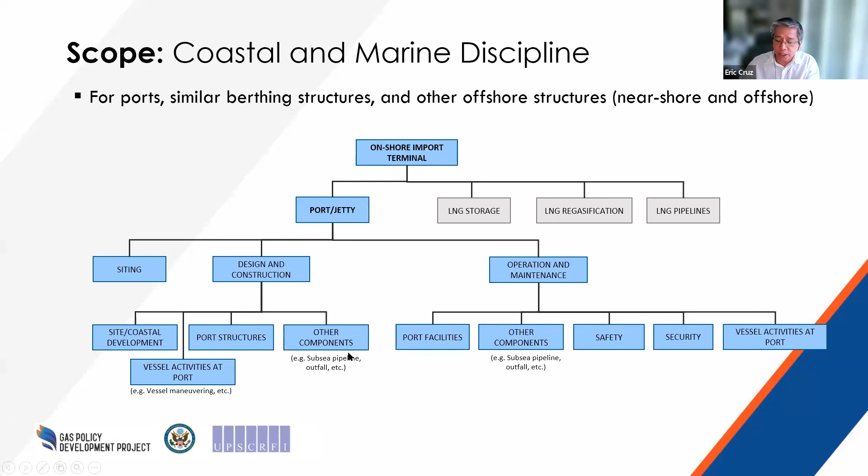This involves a different stage of the business permitting and other permitting activities. And in the design construction, we have site development, coastal development, the planning of the port structures, and other components like the fixed structures that are used in the activities for the handling of the cargo.

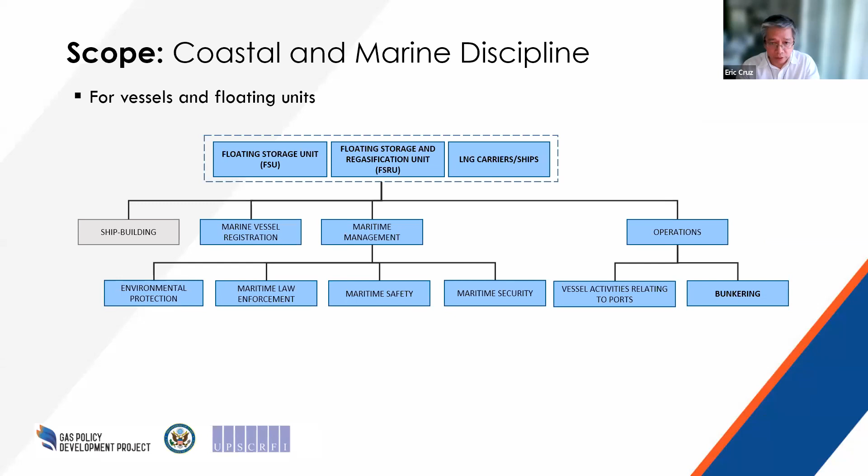For vessels and floating units, you have these different aspects that are under coastal and marine discipline. And I will focus on the coastal and port engineering aspects that are identified in this scope.

Tides are due to the planetary forces between the sun, the moon, and the earth. These forces are affected by the rotation of the earth about its own declined axis, and also by the distribution of the land masses on the surface of the earth. These are important forcing due to the environmental loads, because tides also become the takeoff levels of storm surges and other ocean hazards.

Winds exert shear stresses on the sea surface, and these stresses in turn affect the sea hydrodynamics that pertain to the water surface levels, the currents, and the waves. Also, winds become forcing functions to the drag and inertial forces that are exerted on docking facilities, as well as the moored ship.

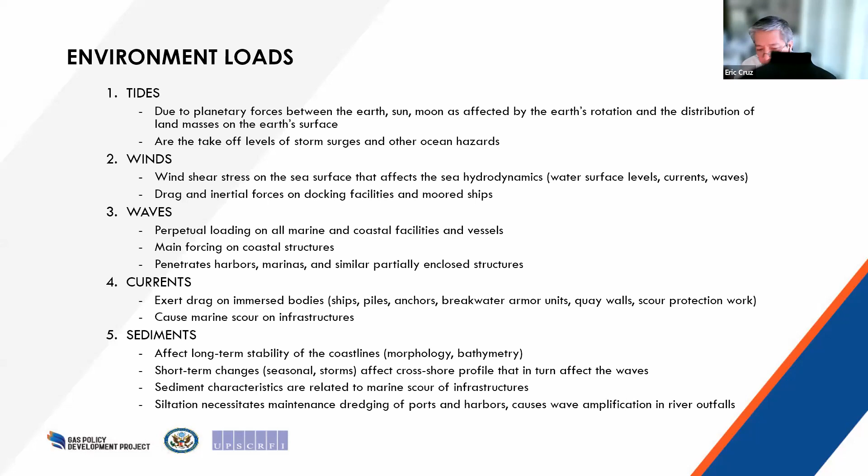Sediment characteristics are related to marine scour of infrastructure. So we need to know the size and the density of the sediments around our structures in order to estimate and calculate the marine scour generated by the action of currents and waves on these infrastructures. On the other hand, if you have siltation, this means there will be some decrease in the ambient depths of ports, and that means there will be a necessity of maintenance dredging of these ports and harbors. This siltation also causes amplification of the wave energy in river outfalls.

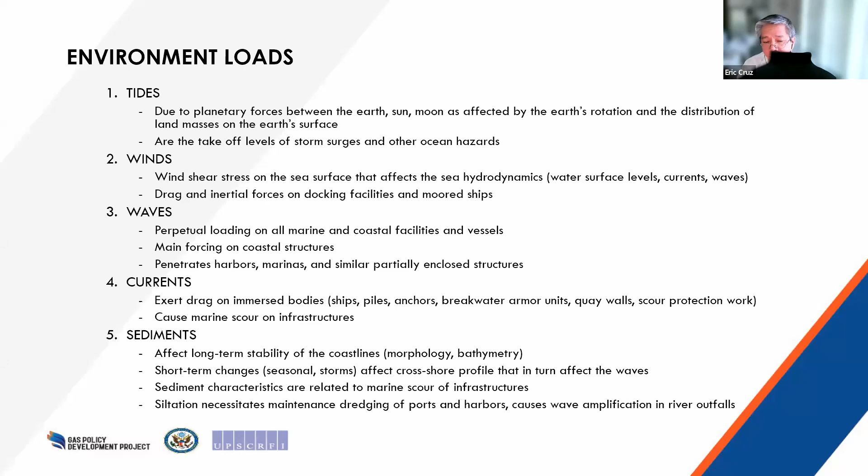So it's important to locate where outfalls of rivers from inland carrying surface runoff will be in relation to the port location.

Just to have some idea of how waves, which are the perpetual loading on all marine structures including the ship, transform in the nearshore zone: normally we know the conditions of the waves in deep water. That means they are not affected by the processes and phenomena that occur close to the shoreline, and even by the interaction of waves with the vessels, the ship, and with other moving elements in the ports.

So what we normally do is predict the transformation of these waves in the nearshore zone. For example, waves will undergo so-called wave refraction, in which case the direction of the waves will tend to change as they reach shallow water. They tend to move as if they want to approach a normal direction, that means perpendicular to the shoreline.

The other process is wave reflection. If you have some obstructive structure like a rubble mound breakwater, the waves will get reflected because of the presence of these boundaries. You also have wave damping - if you have a porous structure, then in addition to the reflection, some portion of the incident wave energy will be damped, and only a fraction will propagate towards the shoreline.

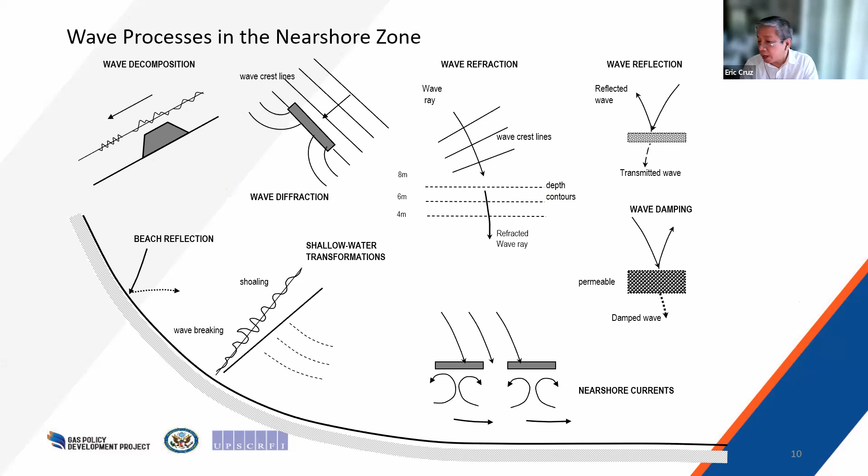In particular, the so-called wave decomposition. This topic has been actively researched, and we have an almost complete knowledge of how this wave decomposition happens. Now, some applications of wave transformation in the planning of ports.

And the company—in the 1970s there was an oil shock because of the sudden closure of the oil fields in the Middle East, and one oil company in the U.S. suddenly put up a big wharf in El Segundo without the benefit of a coastal engineering study. And what happened is that during a certain critical condition of the wave approach from the ocean...

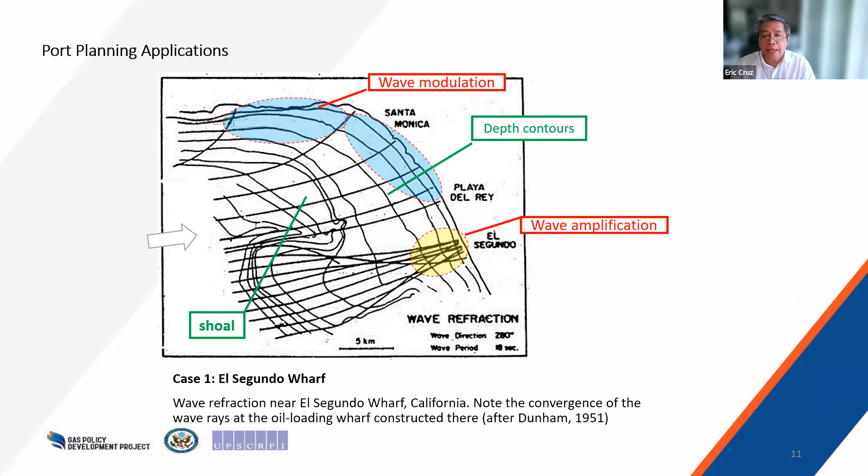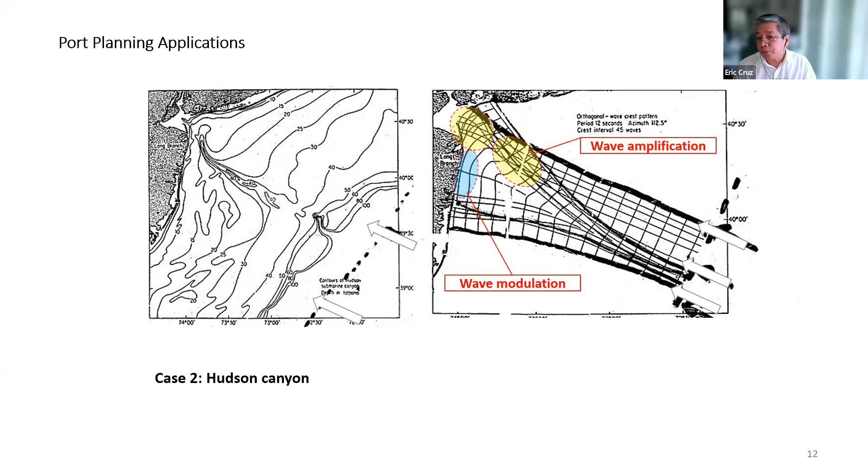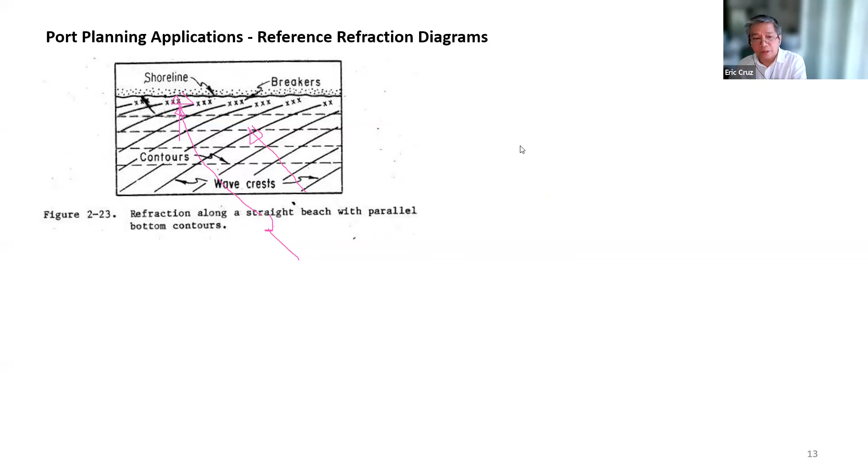This is another type of very common bathymetry - a straight coastline, but now with a canyon in front, a submarine canyon. So it's like, in the case of hydrology, these are like valleys, except that they are submarine. So if the waves are coming from the south, the waves tend to focus in the area to either side of the canyon, and they tend to diverge in front of the canyon itself. So that means the area in front of the canyon is a good site for a port.

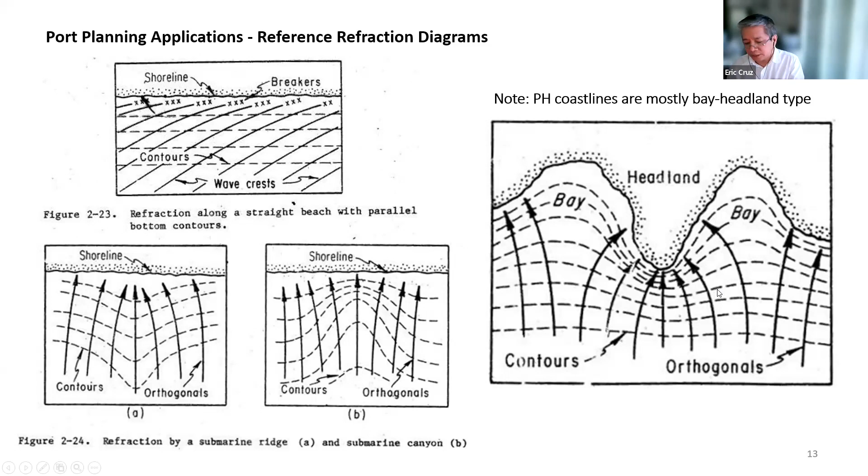You have the spilling type—the most common is spilling type. Then we have the plunging breaker, which wave surfers like; they look at the site where the breakers are plunging, and not anything else. And we have another type of breaker called the surging breaker, which is like the hydraulic jump in many spilling basins, stilling basins of dams. The Japanese also have a fourth type called the collapsing breaker.

But anyway, we normally determine the type of breaker because, first, it is the threshold of the wave growth, the wave height growth. And if you have a structure that is in the so-called surf zone, delineated by the location of the breaker, then the wave forces exerted on the structure—same structure, same size, same height, same length, same depth—if the waves are breaking there, the forces exerted on that structure will be greater than if the waves were not breaking.

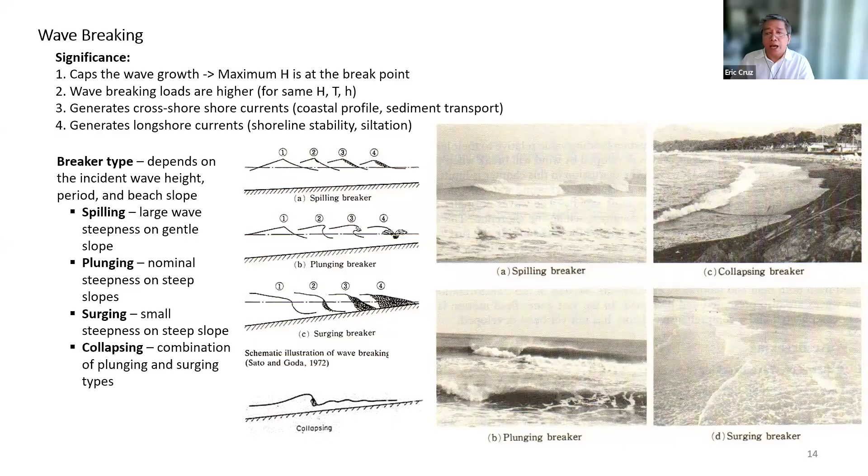These are some of the things that coastal engineers analyze in the coastal area—because we have limited time, I will not discuss all of this. For example, when doing the design of a port: we have a coastal harbor here, and a pair of coastal jetties. The coastal jetties make sure that the entrance to the waterway here is always navigable.

This is made possible by making sure that the so-called littoral material on both sides of the outfall is stable—they do not bypass the entrance. Otherwise, this entrance would be non-navigable and therefore a hazard to navigation. So what we do is quantify the effect of diffraction, for example if there's a breakwater here, to make sure this area is passable by sea-faring and river-faring vessels, so that this area is always safe for navigation.

You will also have a case of construction of ports when the bulkheads are still being constructed—they are usually constructed with caissons. So you have here some spaces that are still open to wave action.

It's an actual case in Japan that I got involved in, called the Hitachinaka Harbor—a 40-meter deep transshipment hub along the coast of Tohoku, which is northeast of Tokyo. This is actually a 3.5-kilometer long quayside breakwater.

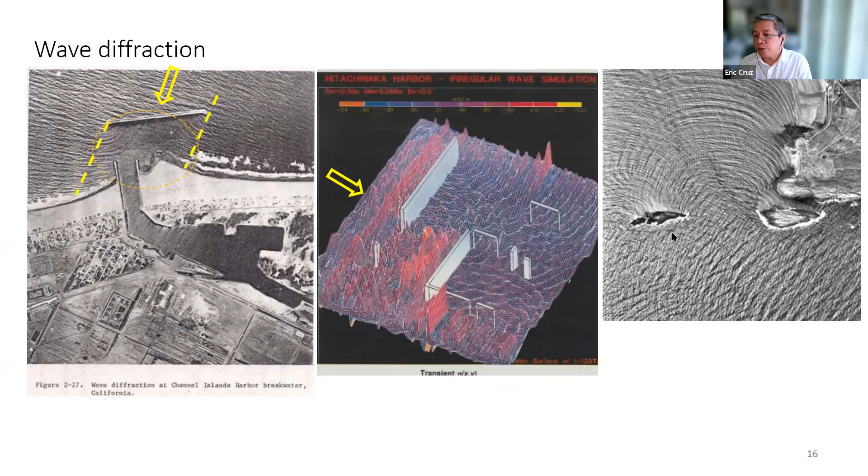Also, islands cause diffraction. So you can see that these islands will cause these diffractions.

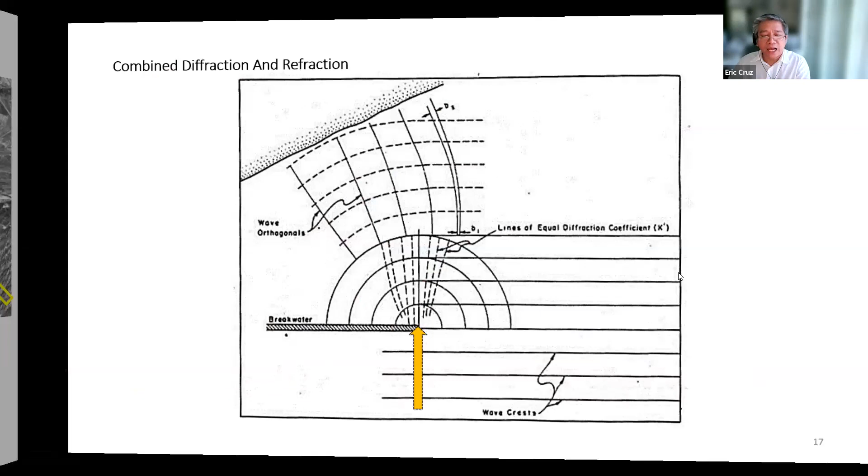So in the case of port planning, for example, if you have a coastline like this, and the main breakwater is configured as shown here, then what is done when computers were still not very powerful? If the waves are coming from the south, for example, what is done is to first do a diffraction computation up to a certain depth, where the waves do not feel the bottom yet. Then after some time, from that point on, refraction analysis is done. So these are separate processes when computers were still not powerful.

But nowadays we don't do this. We use a nearshore wave model to determine all the wave conditions, including the currents generated at the breaking point.

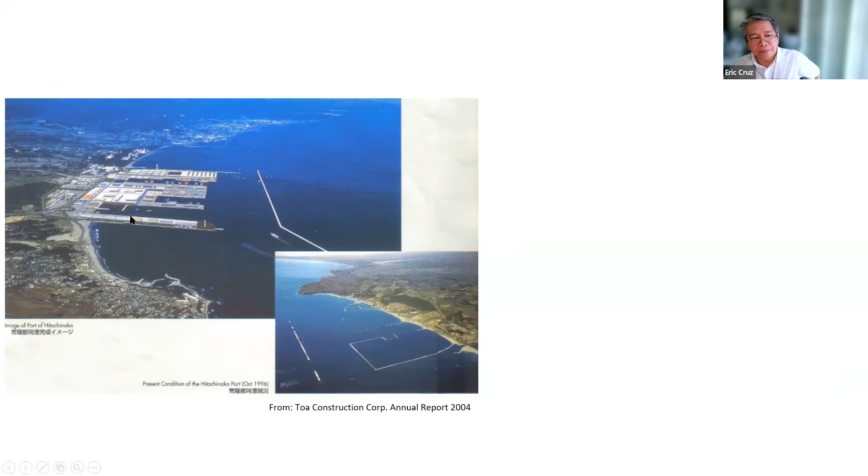And this long breakwater is 3.5 kilometers long, and then we have the main bulkhead, and then we have the berth there, and then we have a pier here, and then we have some smaller berths there. And we did some analysis for the construction stage that I showed you in the previous slide.

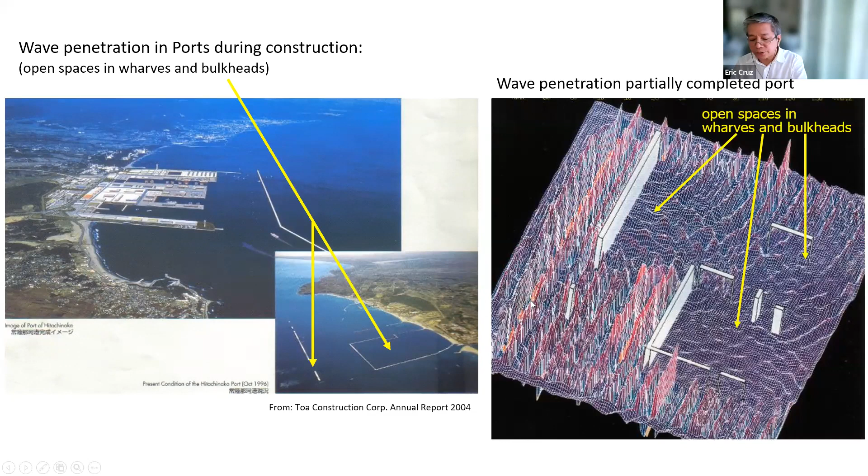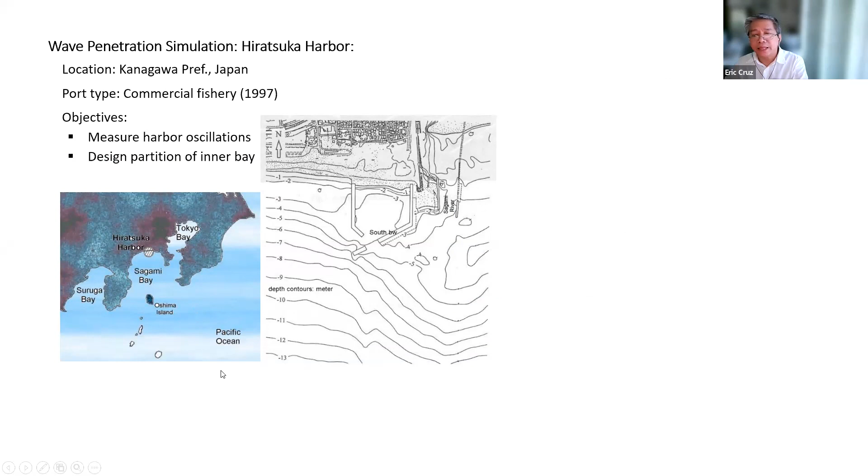At one point, this was in 1997. At that time, Hiratsuka Harbor in Kanagawa Ken was used mainly for commercial fishery. That means the fishermen in the municipality were using it to load and unload their catch.

And after some time, they learned that the income from this harbor was dwindling. And they found that the reason was that the fishermen who became richer did not engage anymore in commercial fishing. Instead, they had recreational boats and yachts bought, and they do not do commercial fishing anymore. So there was a decrease in the demand.

So what the municipal administration did was to partition the original bay into two bays, one serving the now decreased demand for commercial fishing, and the other one now catering to the recreational demand of that area. So what we did is to analyze the effect of partitioning the inner bay, so that we see how the interior will be affected by the construction of this partition of the harbor.

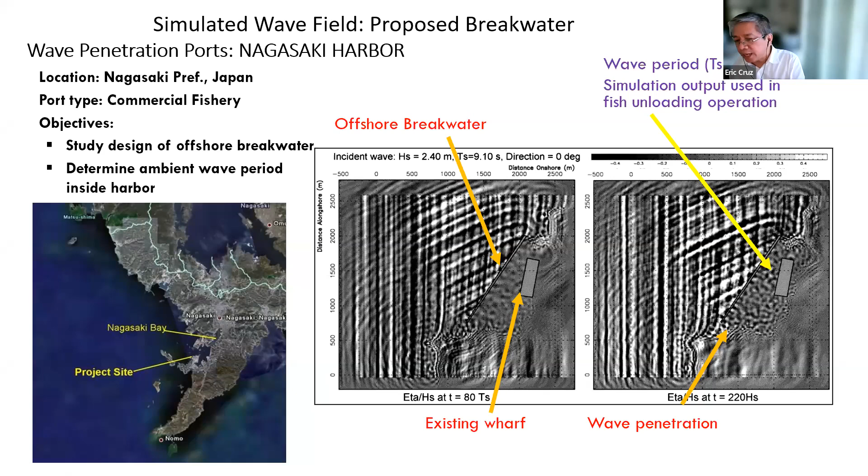what the wave period will be in this area, because that's needed by the fishermen to program their loading and unloading operations. I think I have only 5 minutes now.

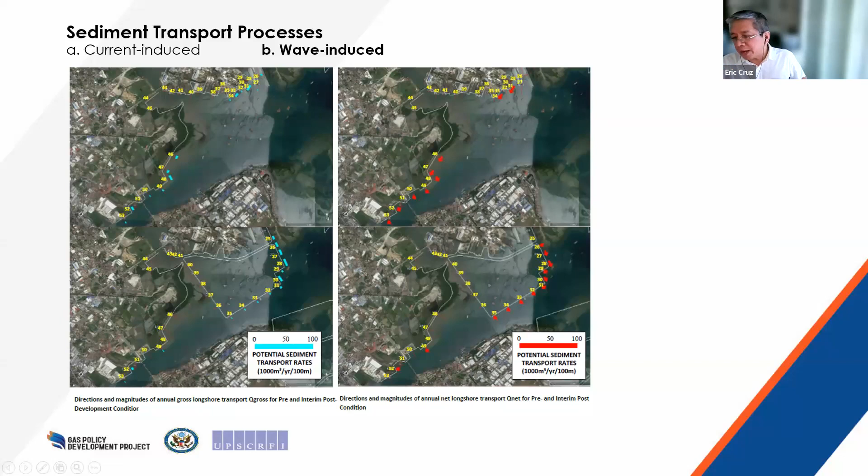Recently undertaken, one part of the project is to analyze the resulting longshore sediment transport rates. These arrows show the directions of the longshore transport induced by the waves. The waves break and induce some current, which will try to carry sediments that are small enough. These vectors indicate the intensity of the currents induced by the waves. The longer the vector, the higher the longshore current that will transport the sediments.

So for many reclamation projects, this study is necessary, because the modification of the water basins by the placement of the reclamation will modify the sediment transport pattern. It's not enough that only the island is studied. It's also very important that the effect of the island on the other adjacent coastlines be studied as well.

So this shows the changes in the sediment transport pattern when you have a reclamation area like this. Originally there wasn't any island here, so it's going to change. For example, this one downstream, before the construction of this island, actually changed like this. So the pattern, the directions, changed.

Also, the so-called total transport rate, which is needed for the determination of the volume of backfill that will have to be placed along the shoreline. It's not directional transport, so you can see here the changes in the gross transport rate. This is very important for both ports and reclamation projects.

So these coastal hazards pertain to storm surges, typhoon waves, coastal flooding, wave overtopping, marine scour, seiching, and tsunamis. I will discuss the first one, which is very common to us, very frequently occurring in this country: the storm surge and storm waves.

For example, this is a vertical profile of the coastal area. If you're trying to plan a port for LNG facilities, the analysis of the hazards is important because LNG facilities, including the LNG ship, are very sensitive to the motion of the ship. If a certain threshold of pitching and rolling motion is exceeded, the LNG ship may experience deformations and displacements.

At worst, it becomes internally unstable, meaning the internal stresses of the ship's hull may be exceeded. Anyway, you have here the coastline, and normally you have a mean tide level. Then, because of the tide action—planetary forces between the sun, the moon, and the earth—the sea will oscillate, and at some point during a high tide, the astronomic tide is here. Then comes a tropical storm, which becomes a typhoon, then a super typhoon.

By the time that super typhoon reaches the coastline, it would have induced a cyclonic wind field that exerts shear stress on the sea surface, which uplifts the sea level—that's what we call the storm tide level. So this is the storm surge, acting during a high tide.

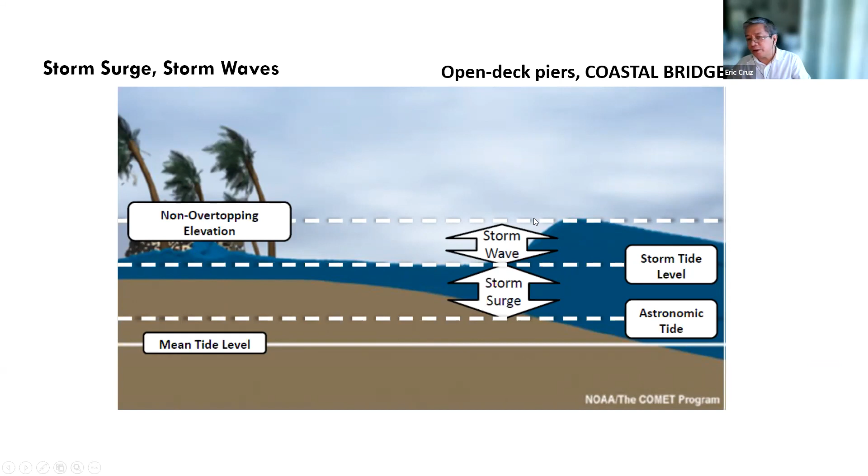So it's very important that piers for LNG ships, especially if it is an open deck pier, are placed above the so-called storm tide level.

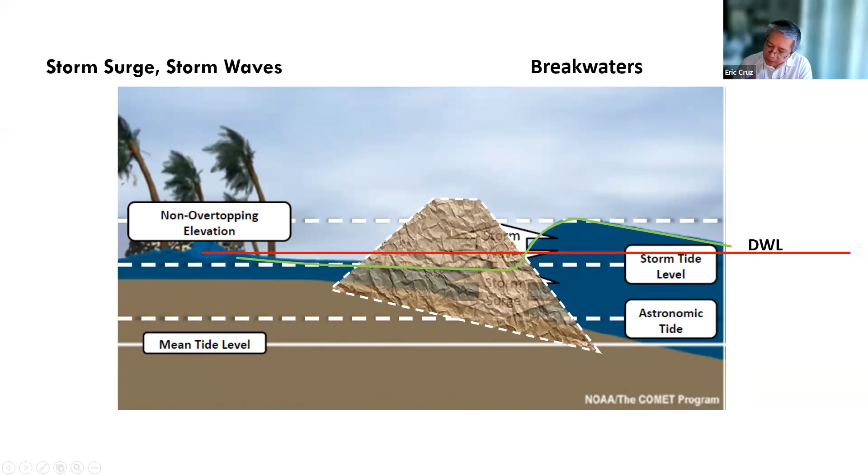Well, if you have a coastal protection structure like a breakwater, not a pier, then instead of just accounting for the storm tide level, we also need to account for the action of the waves as they interact with the structure.

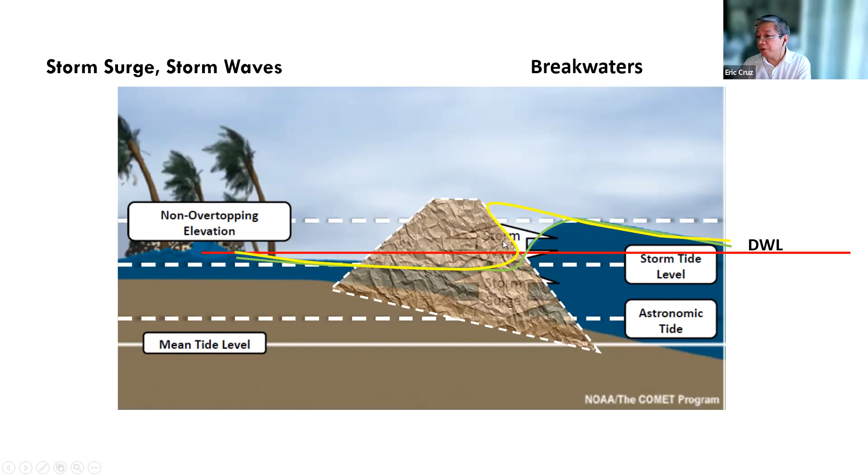One particular case is the run-up of the wave. Normally, if the structure is not high enough, there will be some wave overtopping, and that wave overtopping is taken into account in the design of the structure as well as the protection of the coastline.

The other hazard is tsunami. So this is an updated map of the tsunami-genic events in the Philippines. This is the Philippine archipelago, and you can see the geographical distribution of some tsunami-genic events. Tsunami-genic means that there was a seismic activity that caused a tsunami in the area.

So here you have the geographical distribution of the tsunami events. The coloring is based on the casualty—red means very high casualty. Sorry, let me correct: red means that the seismic magnitude is more than magnitude 9, the color represents the number of deaths, or casualty, and the size of the circle is the magnitude of the earthquake.

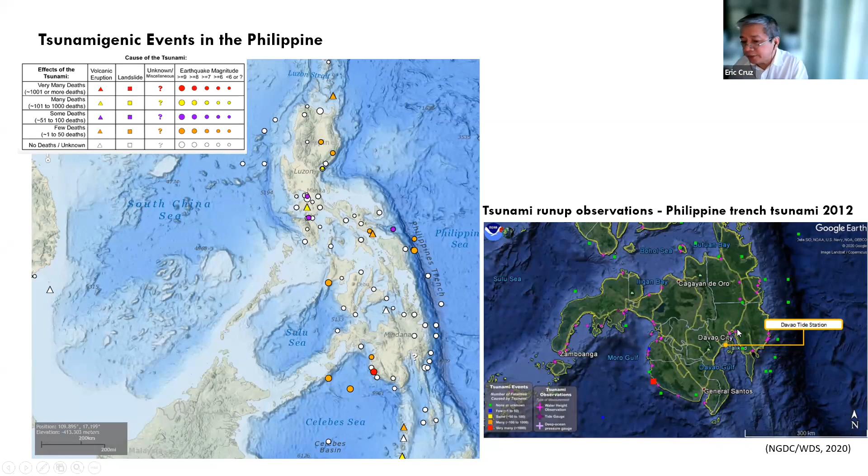We did the simulation of the propagation of the tsunami. Sorry, this one is not in Davao, this is from another site—a far shore tsunami that was generated in the Pacific Ocean. We did the simulation of the propagation of that tsunami as well.

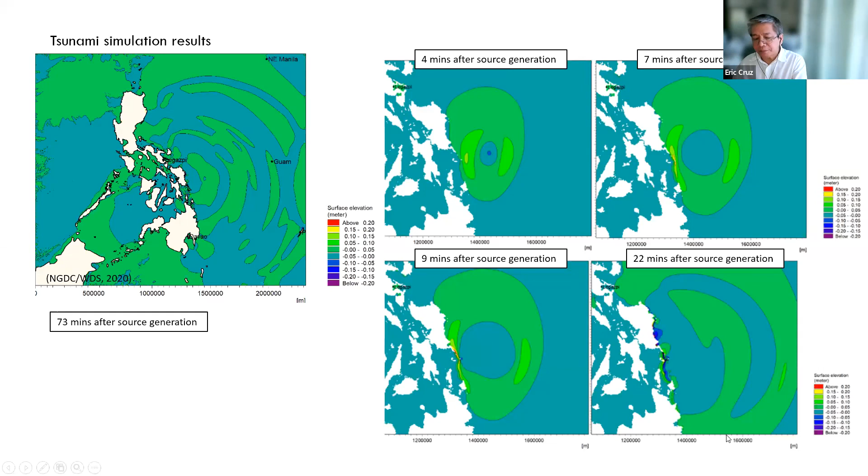You can see here some snapshots of the simulation. Our interest here is to see how this tsunami will propagate in the enclosed areas and the port areas adjacent to the source, so that includes Davao Gulf. You have Davao here, and then Samal Island, and Talikod Island. You can see the propagation here.

This is in Davao. This one, I think, is somewhere in Bicol—yes, this is in Legazpi Port, which is also an enclosed, elongated water body, very susceptible to tsunami penetration because of their plan form and shape.

We did the analysis there, and then we compared with the results. So these are some of the results that we got. In tsunami studies, it's important to have the maximum amplitude simulated. We did some simulations and got good results as far as the maximum oscillation of the water surface was concerned.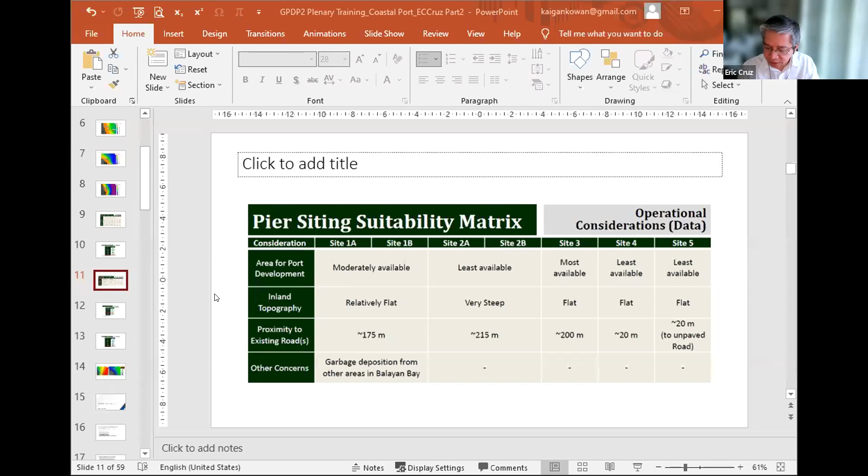We start with port siting and end with quay walls. Port siting involves assessing how a contemplated site for a port is evaluated. In the case of multiple possible sites, which is usually the case in many private port developments, you will have to choose among such multiple possible sites.

I will tell a story about an actual project that was done, but this is not a government port project. It's a private port development involving the planning and siting of a cargo port in Calatagan, in Batangas.

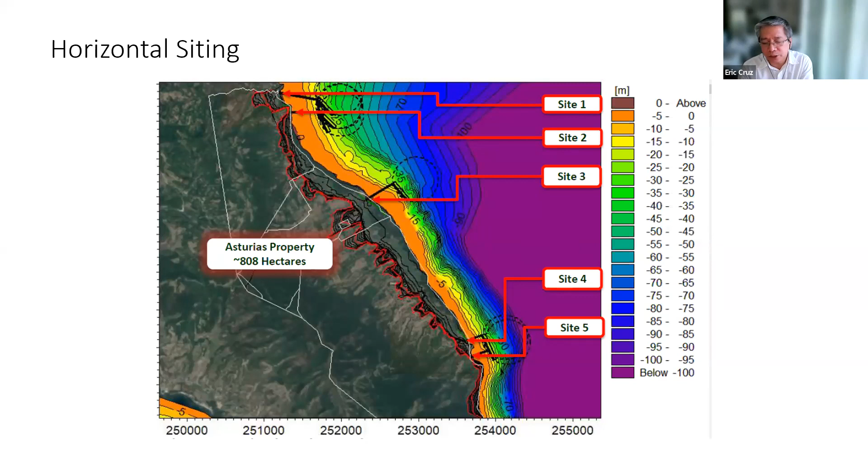There are 5 sites being considered for the location of the cargo port, shown here from north to south. Along the contemplated coastline you have sites 1 to 5. The total area is not so big and not so small, about 800 hectares.

This one is site number 1. This is the shoreline. Because of the size of the ships expected to use the port, we have this siting for the draft of the ship.

After knowing the draft of the ship, we do some adjustments for different elements of the siting process. That means we take into account the draft of the ship, then the low tide, then the so-called squat of the ship, and then other parameters.

Even the effect of the so-called turning basin matters. If the turning basin will be used, then you need allowance for the draft of the ship. Finally, after that depth is computed based on the required draft of the ship, these lines - the solid red line, the solid dash line, and the dash line here - are the locations where the minimum required depth for these two marine vessels, Icarus and Panamax, can be placed. So you have those reference lines here.

As the ship navigates towards the pier, it has to turn around a certain area called the turning basin. The size of the turning basin is usually dependent on the overall length of the ship. Ships have these geometrical parameters, and from these parameters we can determine the area of the turning basin based on some guidelines. In this case, the standard port handbook guidelines say you need to have a certain turning basin like this. So with that, we can plot the layout of the turning basin.

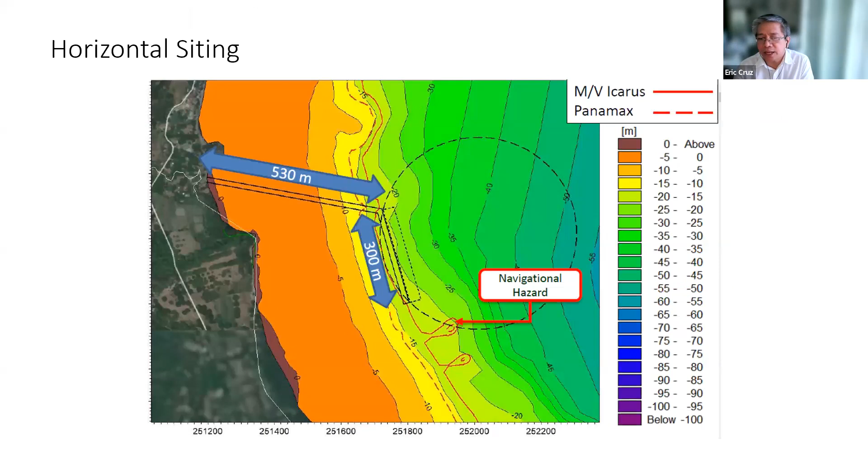The other sites are drawn in a similar manner. You have here a site that is just close to the tip of this peninsula in Calatagan. If you go around it and go to the southern portion, that area is already relatively exposed to the hazards of the seas and the oceans. Anyway, that is done for the rest of the 5 sites.

So after all this preliminary plotting and superimposing of the required water basins is done, then a relative comparison of the characteristics of the site is made, in terms of different criteria. For example, the length of the trestle needed to connect to the land, the marine terminals, to the pier. Also, the maximum vertical distance to the seabed, because that's going to determine the length of the piles needed to support the pier.

Also the soffit elevation, which assumes that the pier will not be overtopped by waves during a storm. This is obtained from an analysis of the storm surge and storm tide that I discussed in the first part. And then also the design wave height, which is very important in the sizing of the piles, the slab, the wharf, and the trestle. Everything else will depend on the wave height, so this is very important.

And then dredging requirement. We have a turning basin, and that basin has to be navigable by the expected ship. So we compute if there is any dredging needed for the turning basin. And then the landing alignment—these ports will use trucks, so if you have a bad alignment of the trestle, the trucks cannot easily enter. So you must have good transport access to the trestle in order to have a good pier design.

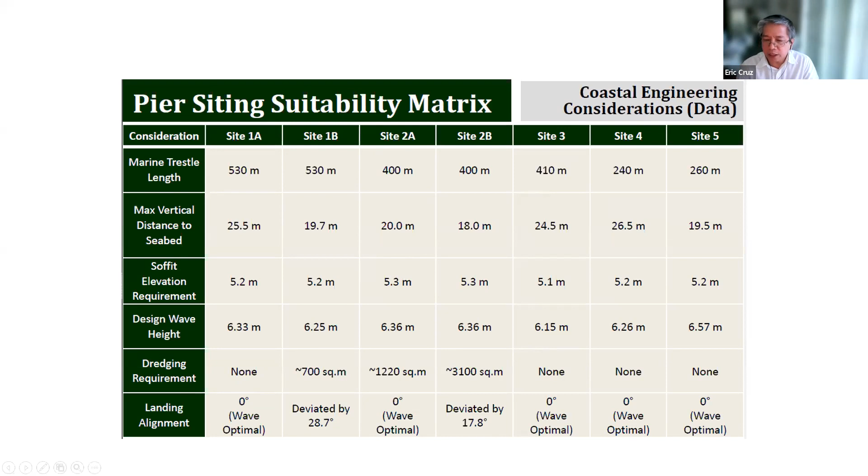With these coastal engineering considerations, we rank the sites, and these are the numbers obtained from each of the analyses in the preceding slides. We also do the analysis of the wave heights and the storm surge, storm tide levels, to determine the soffit elevation and the design wave height. Finally, we have a matrix of the so-called siting suitability of each of the candidate sites, and we translate this into some kind of ranking.

So you have actually 1, 2, 3... 7 sites actually. Because site 1 has 2 possible alignments of the pier, and then also site 2. So in total you have 7, from this number crunching analysis and preliminary design. The enumerated assessment of the possible sites can be done, and this is the result for that particular project site.

And it seems that from this analysis, site number 5 yields the lowest score. The lower the score, the better the site characteristic, like upgrades. So the lowest score is the one considered initially.

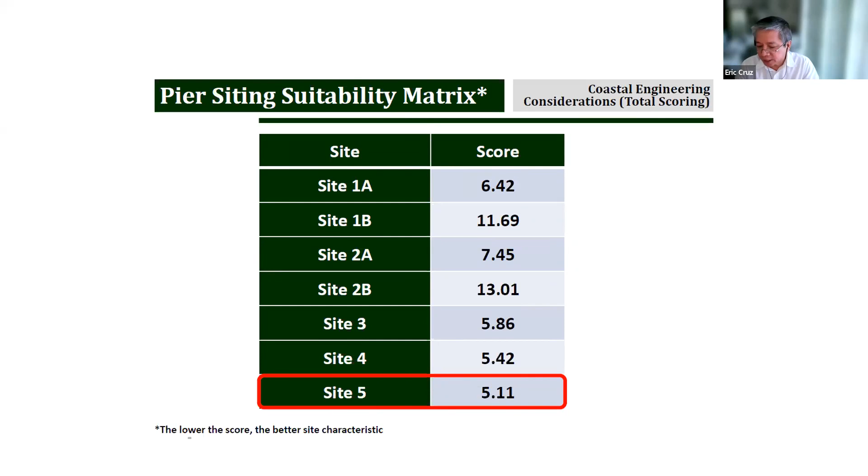But you also have some other criteria for the siting of the port, like those that do not directly bear on the coastal engineering considerations. For example, the area for port development, also the inland topography—if you have a rolling topography, that's quite hard for cargo trucks to negotiate. Also proximity to existing roads, because it's better to have existing roads, since the cost of the civil works and the transportation network will not be prohibitive. These are some other considerations that we term operational considerations.

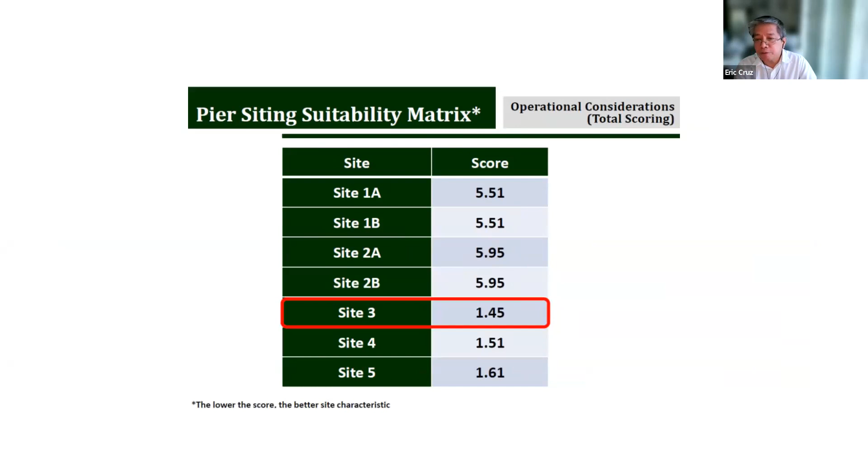And then you can also do the same numeric analysis for the 5 sites. If you combine this particular set of criteria, site number 3 yields the lowest score. So now you're down to site 3 and site 5. If you combine all the sites with equal weights—normally we allow the owner of the port to determine which is more important to them in terms of planning, cost, land acquisition, and other considerations.

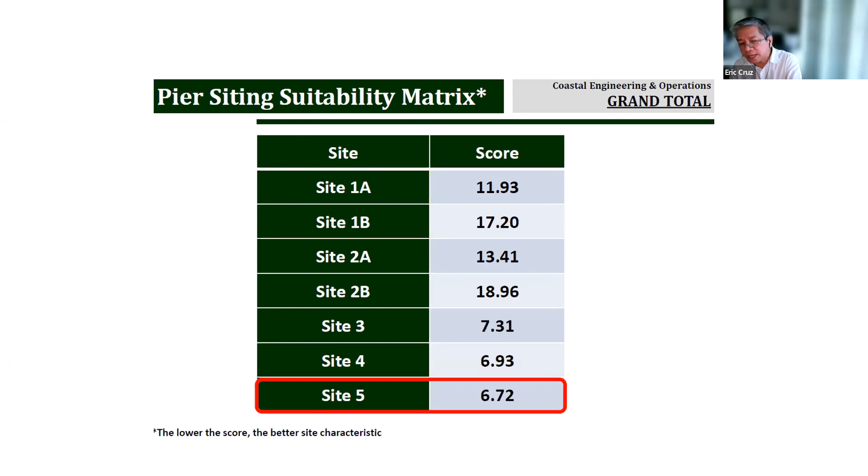So with these weights, we can do an objective analysis of the suitability of the port site. The one that yields the lowest score here is site number 5. So that's actually the one chosen by the owner, based on this matrix.

After the site is selected, you normally go into the engineering phase of the design. First we do preliminary engineering, laying out the structures, then we assess the tranquility of the harbor after setting up the different spaces for the piers, docks, berths, and the main protective structure, the breakwater. Then if there are special requirements, for example for fuel, dry docking, transit sheds, cargo handling equipment, or customs and quarantine facilities, these can all be put into the layout of the harbor.

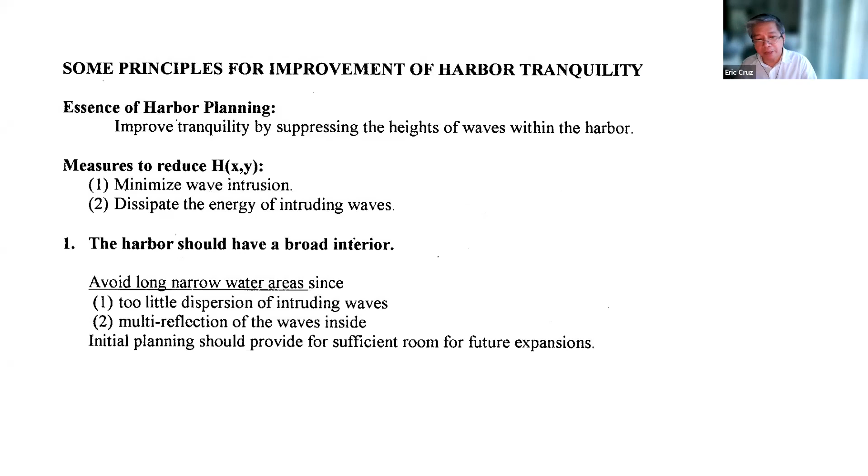There are some principles to make the interior of the harbor tranquil, or at least amenable to the docking and anchoring of ships and other vessels. The first principle is that the harbor should have a broad interior. For example, it says here a broad interior -- I think I cropped out the figure -- but anyway, it has to have a broad interior, not a narrow and congested interior.

Second, if you are designing the walls, the inside boundaries of the harbor, then the portion of the waterfront from where the outer sea can be viewed through the harbor entrance should be left as a natural beach. If it's just a beach coastline, there may be no need to make it a bulkhead or a revetment. First, that will entail cost. Second, it may modify the wave conditions inside.

We also want wave absorbing revetments, for example -- that's shown in the next slide. Here are some layouts of the harbor, where the location of the so-called revetments, which are wave energy absorbing structural features, tend to make the harbor tranquil and not agitated. So we need to place these revetments at those locations.

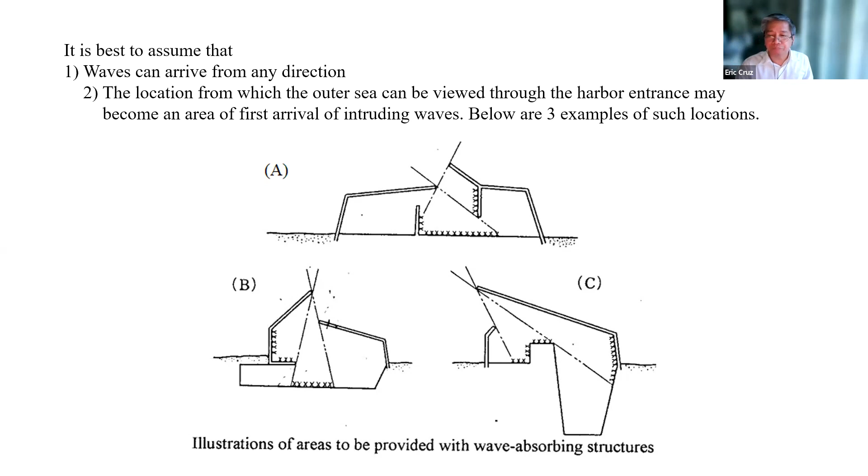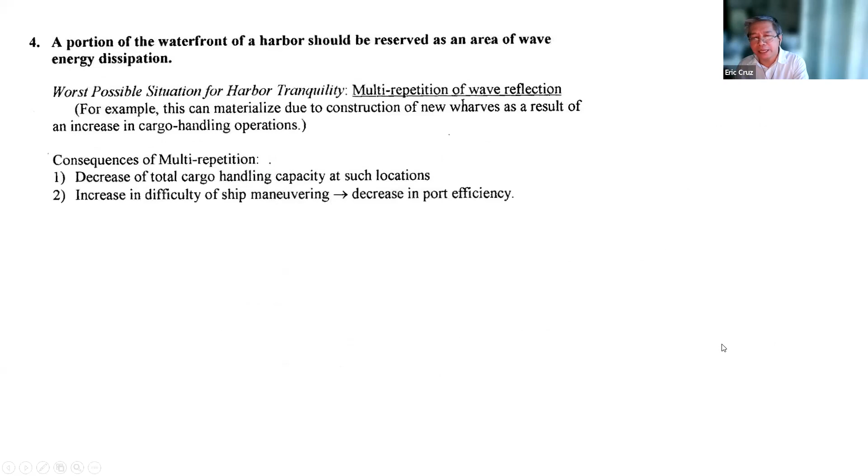Well, this is not really for ports—these are for marinas. But I will not discuss that anymore. Anyway, this is a port. Normally, ports have docking structures like wharfs and piers. Here you have the main breakwater, a pair of them, both attached to the shoreline. Between these breakwaters you have the main navigation channel, the entranceway to the harbor.

Here, waves are coming from this direction. If you analyze the penetration of the waves, you will see that you need to put a revetment in this area so that the waves will not be reflected. Once inside the structure, they will hit some walls, and walls tend to reflect the wave energy. In order for the wave energy not to be reflected by these reflective walls, some areas need to be revetted—like these locations that are revetted areas.

These need to be designed as revetments, meaning non-reflective, but dissipative structures. Anyway, these are some of the principles that are applied in the preliminary design of the harbor.

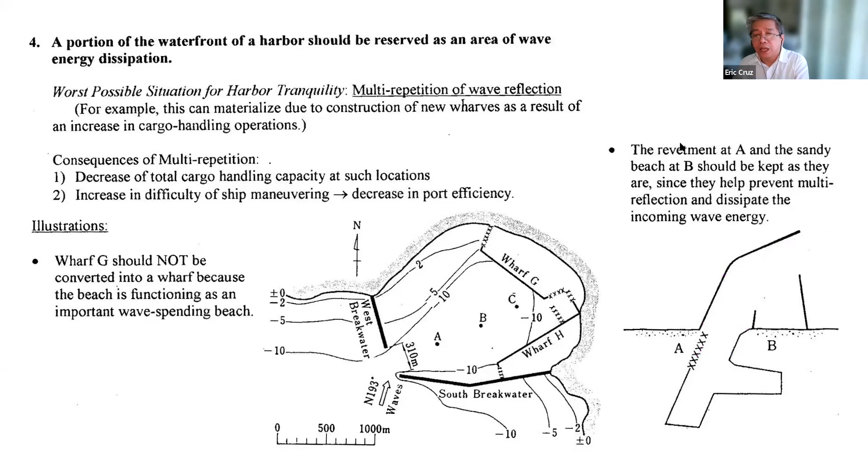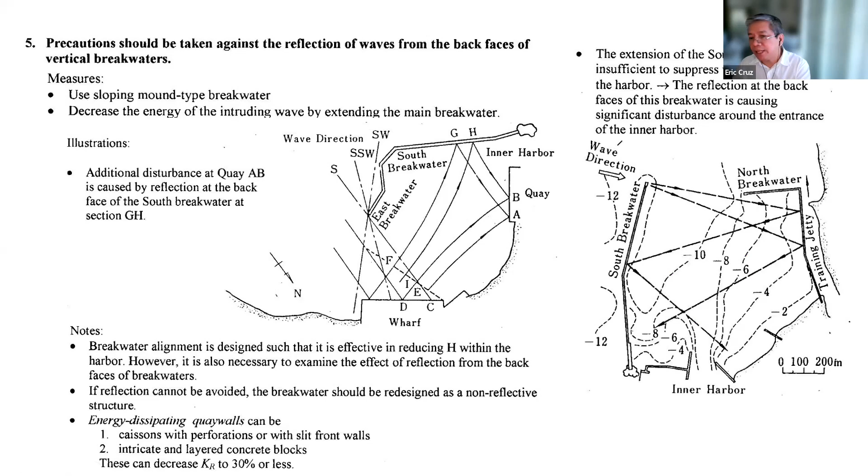Well, these are some other principles in the design of the harbor, for wave tranquility. I will not discuss them in detail. Breakwaters—as you saw, the breakwaters are the main protective structures of the port. If you have a harbor without any marine terminals, that means it's a harbor and not a port. Then you may still need the breakwaters. Although if it's just a harbor and not a port, the marine terminals—in particular the docking structures—may not be there.

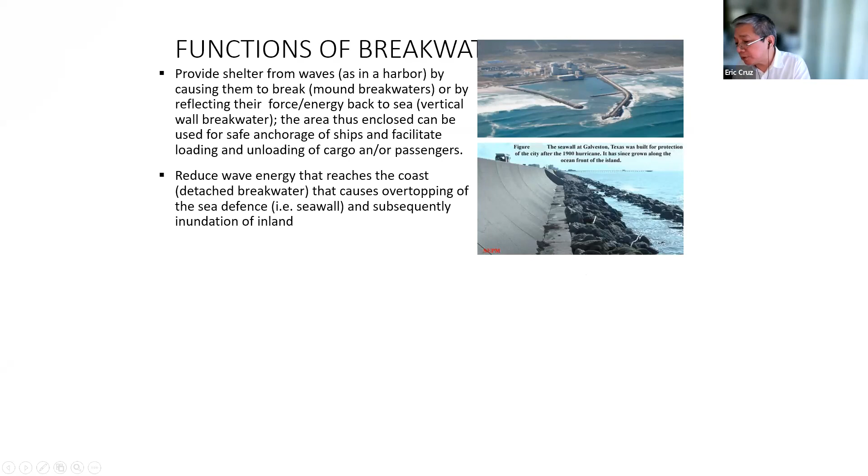This one is a breakwater that's used to stabilize an eroding beach. So you have these so-called segmented breakwaters. They are nearshore breakwaters, very close to the shoreline, and they make sure that the shoreline stays in place there, so that it's not eroded.

And then you have a harbor, of course, to protect a marina, so it's almost completely enclosing it. You have a small entranceway here, so that the vessels can move in and out of the marina.

And then you have here a breakwater that's protecting a coastal jetty. A coastal jetty is not a docking structure—by jetty we use the American parlance—that it's a structure used to stabilize a river outfall. If you have significant littoral material carried by the longshore sediment transport, if there is no jetty here, they tend to bypass the outfall. If they bypass the outfall, sediments tend to settle where the velocities and the waves are calm, and that is bad for navigation. So these jetties are designed to make sure that there is no bypassing of the sand across the river outfall.

In turn, this thing may be subject to extreme storm waves, so a breakwater is used to protect that pair of coastal jetties, so that navigation is continuous from inland to the sea.

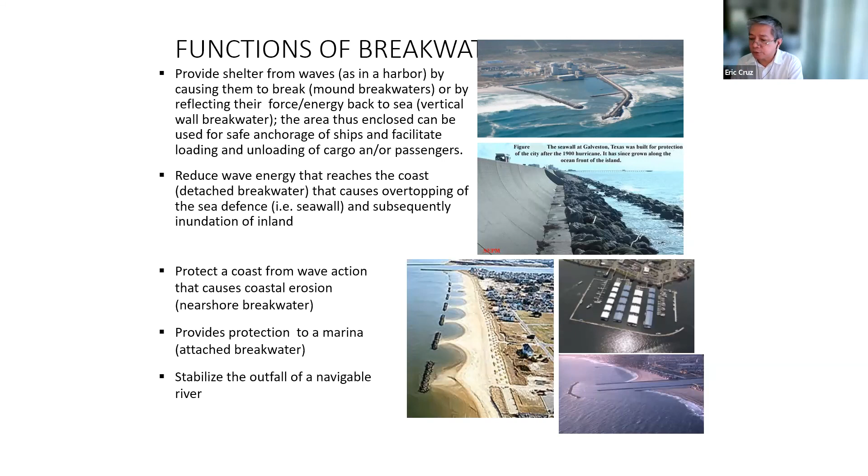So these are some of the types of breakwaters. We don't have time, so I will not discuss in detail, just look at the pictures.

We have, according to crest siting, an emergent breakwater where the crest is higher than the mean sea level. You can also have a submerged breakwater where it's lower, sometimes called a low-crested breakwater.

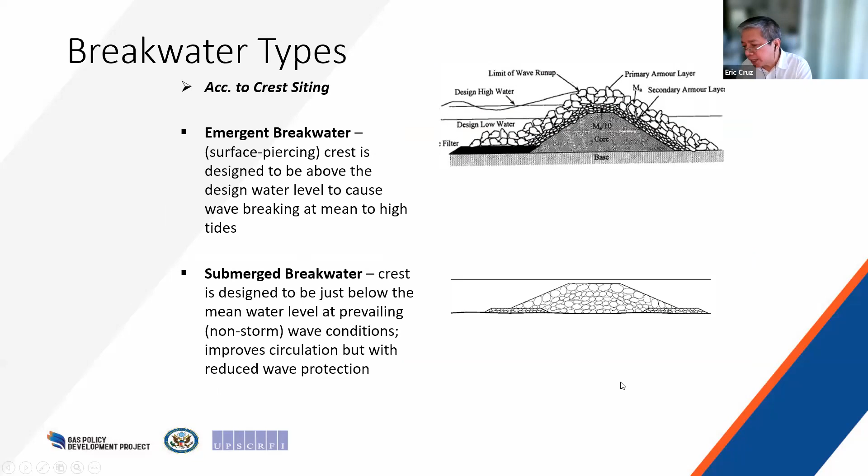Then according to material, you can have this so-called rubble mound breakwater, normally made up of rocks, angular rocks, or some concrete armor units like tetrapods, dolos, and acropods, etc.

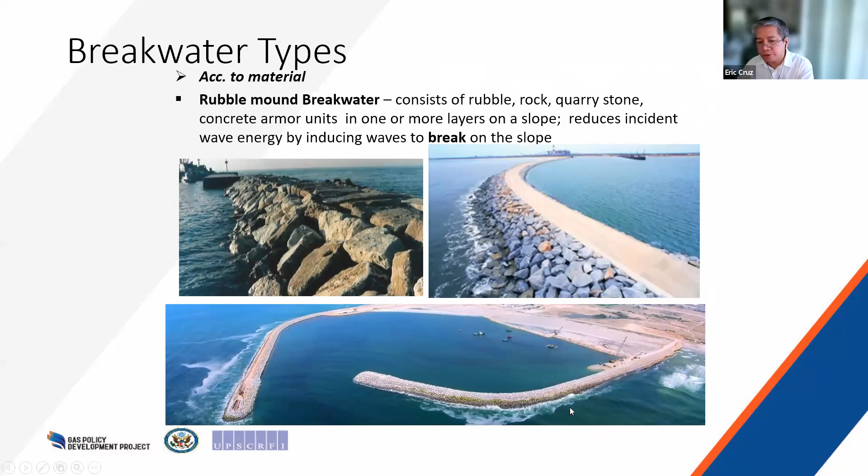Then according to material, weight, and action, you can have a vertical breakwater, like this case. This is just seabed, no rock foundation, just placed on top of the seabed. It's a reinforced concrete structure with hollow spaces and partition walls.

These are cast onshore, separate from the final position, usually at an onshore site. Then this is carried to the site using barges, and then they are positioned at the site. After the final position is done, the plugs in the caisson walls are removed.

And then it's going to sink, and the upper slab here is cast in situ, so that it provides the required monolithic characteristic to the structure. This is an example of this so-called caisson breakwater, a vertical wall. This is an actual photo, I think in Spain.

This one is what we call a blockwork breakwater, where you have stacks of reinforced concrete that are so heavy, and there is a hole here. After they are cast in place, they are stacked in place. Then this is pointed with reinforced concrete and some reinforcement, so that they act as an integral structure.

And then you have other breakwater types. You have conventional, this one without any rock foundation here. If you have a thick rock foundation, we call it a vertical composite caisson breakwater. If you have the conventional breakwater with the fronting rock revetment, it's called a horizontally composite breakwater. And if you have the conventional breakwater except the top is now sloping like that, it's called sloping top.

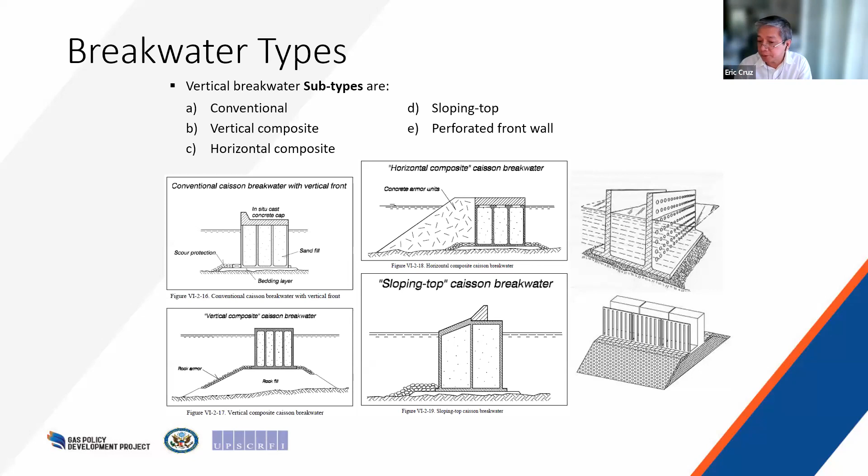Well, these caissons are done like this. They are usually cast in a nearby site onshore, in modules of about 10 meters by 40 meters, and this one is maybe 40 by 40 by 10 or by 20. This one is from Toa Construction, in the port of Kanagawa, and then they are brought to the site.

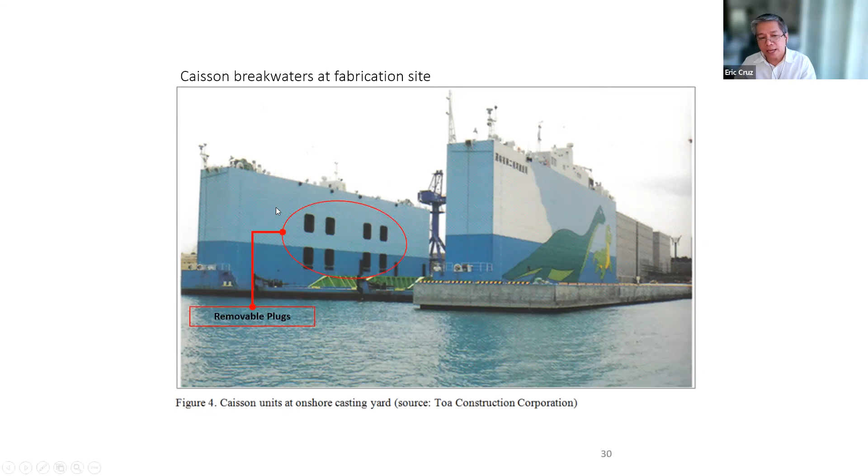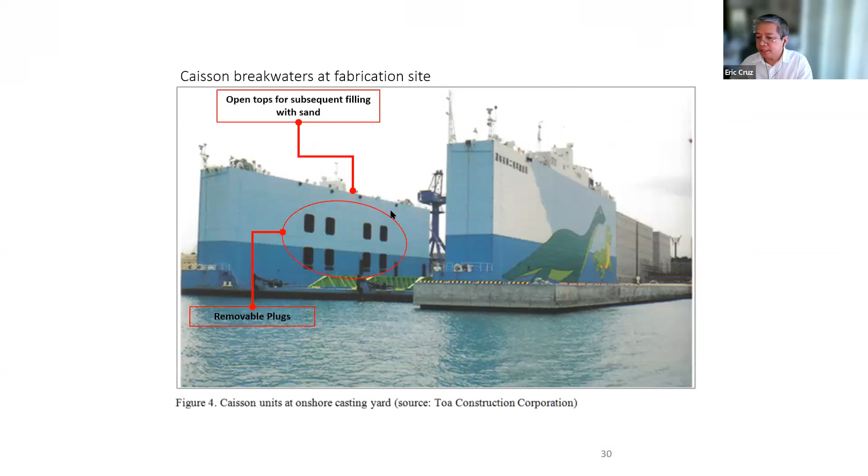These are carried by barges to the final position, and once there, they are sunk by means of pontoons. Once in the final place, the plugs are removed so water can enter. Finally, once in the final position, these open tops are filled with sand, and then the top is cast with reinforced concrete, so that the entire length with these individual modules of the caisson can be considered monolithic.

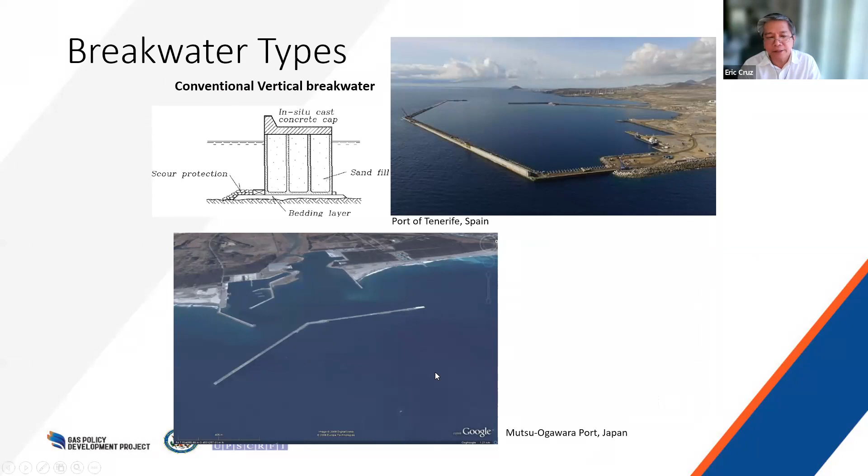This one is in Mutsu-Ogawara port in Japan. And then you have, of course...

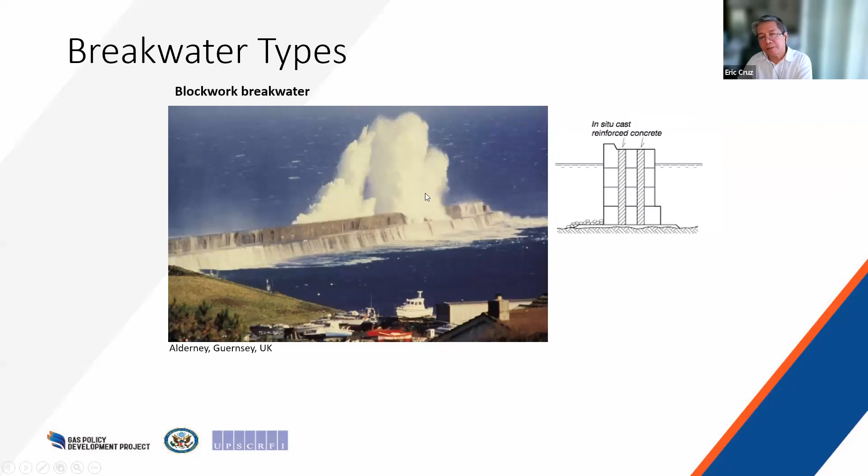In Alderney, UK, you have this so-called blockwork breakwater. You can see the action of the waves splashing against the seaside of the breakwater.

So you have this very long caisson breakwater. This is a vertical composite caisson breakwater. You have here the stockpiling area, the cargo handling area, and you have a secondary breakwater here where the ships can dock and moor.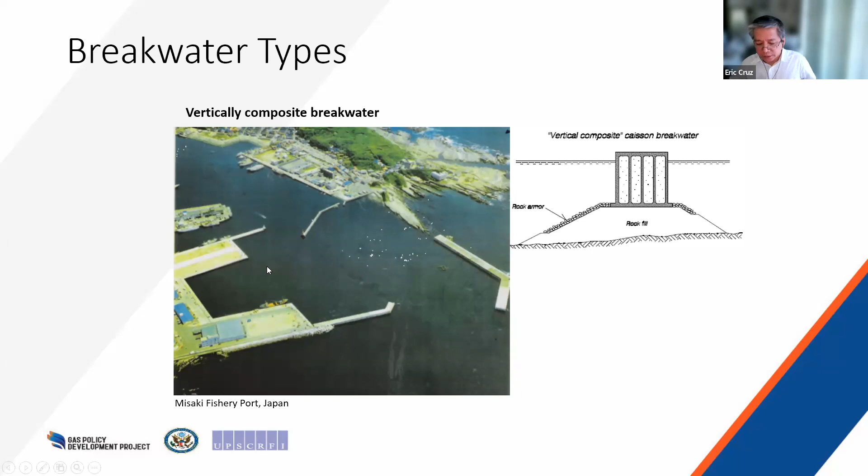You have pile breakwaters, then headland breakwaters, and then floating breakwaters. Well, the most common type of breakwater is rubble mound.

Generally it's like this. So you have essentially an embankment with different sizes of rock. The structural part of this rubble mound breakwater is the armor. So we design the armor first, and then from the armor design, the rest of the cross section follows. And then you have this typical cross section. We normally provide a toe protection for the seaside armor.

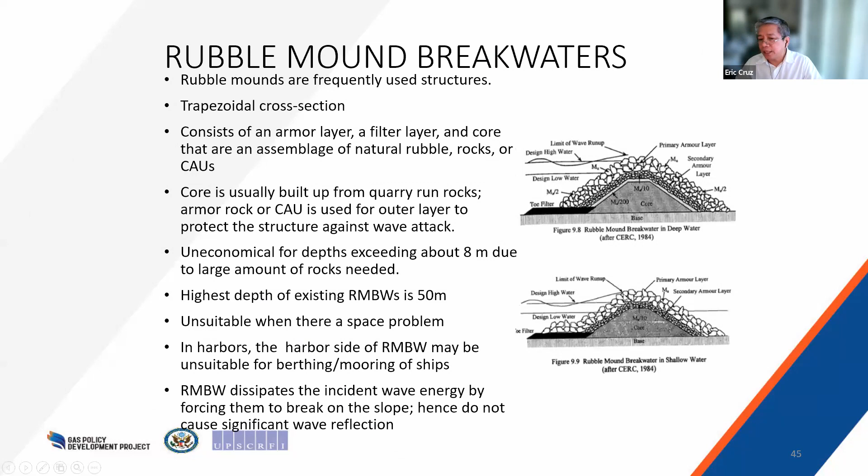And the disadvantage: it needs a large amount of construction materials if the depth is more than about 8 meters. And then continuous maintenance is needed, because the armors will be displaced as time progresses. So you need to make sure that the number of displaced armors does not exceed the threshold, which is about 5% of the initial total number.

It cannot be used for ship berthing because of the sloping side and rough surface. If it's going to be used for docking and anchoring of ships, the ship anchors and mooring dolphins need to be placed very far from the breakwater. Otherwise, the ship's hull can hit them and cause damage.

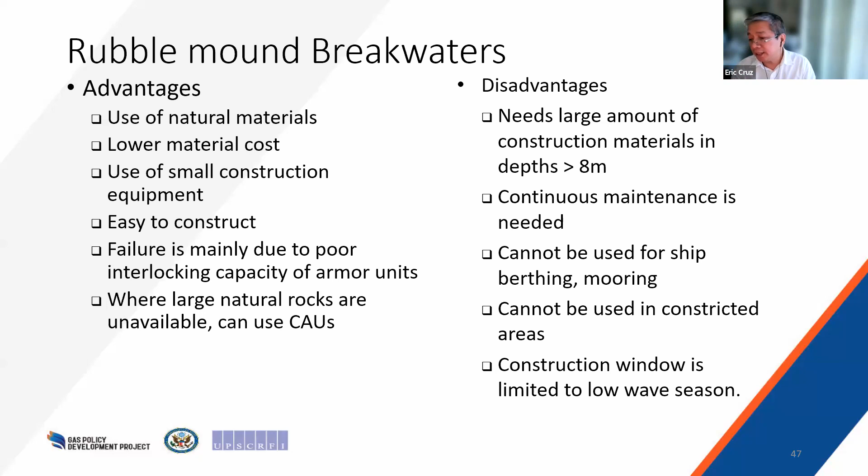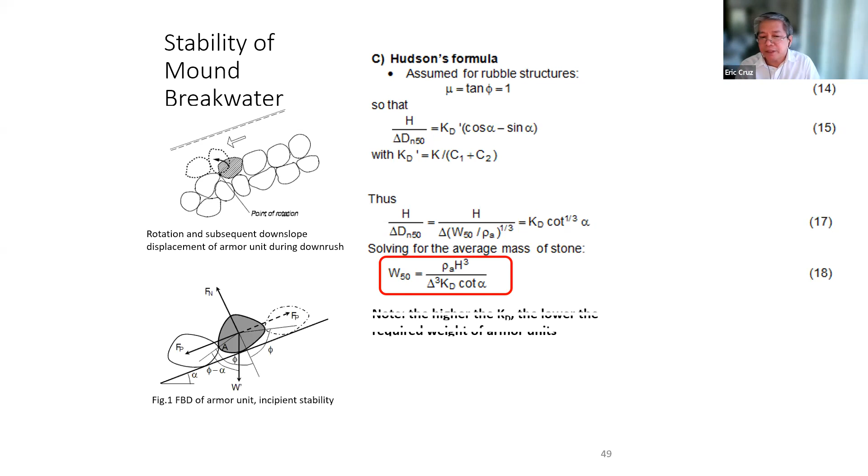We normally design breakwaters based on so-called hydraulic stability criteria, so that an individual armor will not be displaced by wave action. There's a formula we use for that, called Hudson's formula - that is equation 18. And then we determine the required mass of the armor unit depending on the geometry. So you have here the different geometries of the concrete armor.

Normally it's quarry run rocks, if you have a quarry site where you can blast, say, a good basaltic mountain, and you can get the required weight, then that's good. But nowadays it's hard to do that, because you need to seek the ECC to do the dynamiting and blasting of the quarry. It's not so easy to do that.

Anyone can manufacture this. Core-loc is an American invention from the U.S. Army Corps of Engineers. Accropode is a French invention. And then we have others, like Dolos, which is South African.

You have other geometries, like the cubipod, the antifer, and the tetrapod. Tetrapod is E, and this one is Xbloc. This one, I think, is in the Maldives. You can see the size of that Xbloc relative to that engineer.

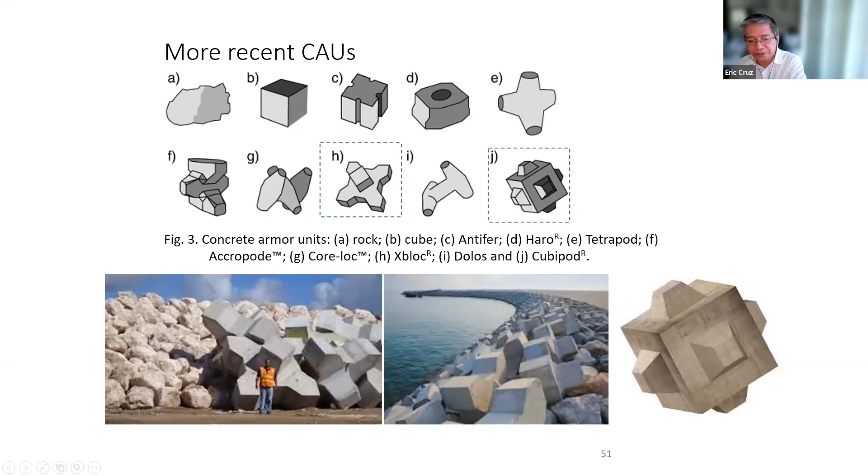So there is a sample, simple design exercise for the armor layer of the rubble mound breakwater. But if you're interested in this, please refer to this slide.

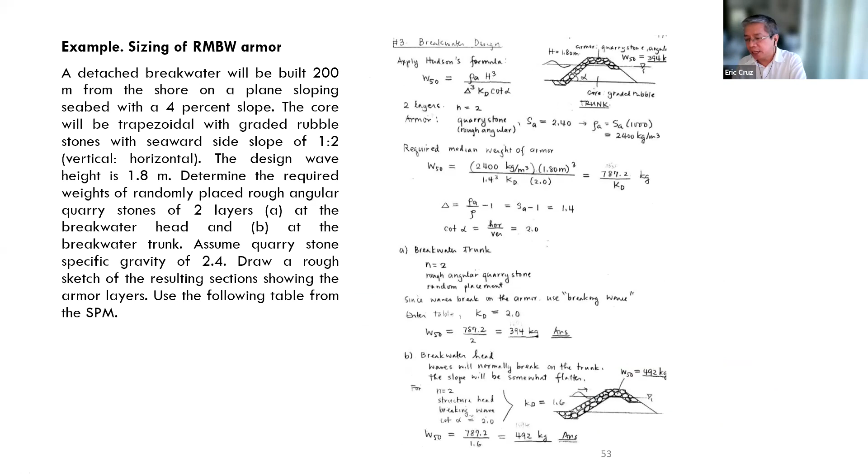Okay, quay walls. These quay walls are very important infrastructure of ports, especially those catering to passenger ships, because passenger ships have more stringent requirements for the thresholds of ship motion.

You can see these quay walls, for example, here in the UK. You can see the structure is a lattice type, not a solid wall. And the reason is that...

These quay walls prevent the reflection of penetrating waves in the harbor. If these waves are allowed to return to the sea, they will cause an undesirable phenomenon called seiching, and we don't want seiching to occur. Seiching means that if you are inside the harbor and the design is bad, then the wave height inside the harbor is bigger than outside, which is an undesirable condition.

So to prevent that, quay walls are designed mostly for passenger ships that require a smaller threshold of ship motion because of passengers.

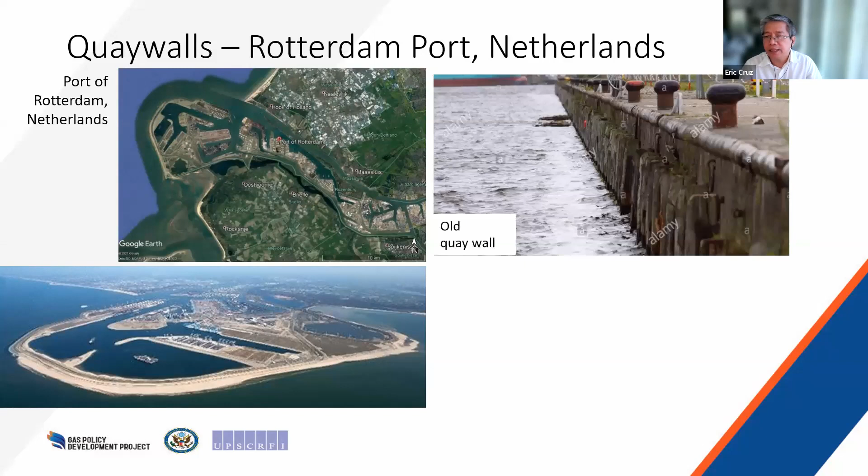You have these quay walls in some parts of the world, like in Netherlands. This one is in Rotterdam, and the old quay wall is being rehabilitated with this design.

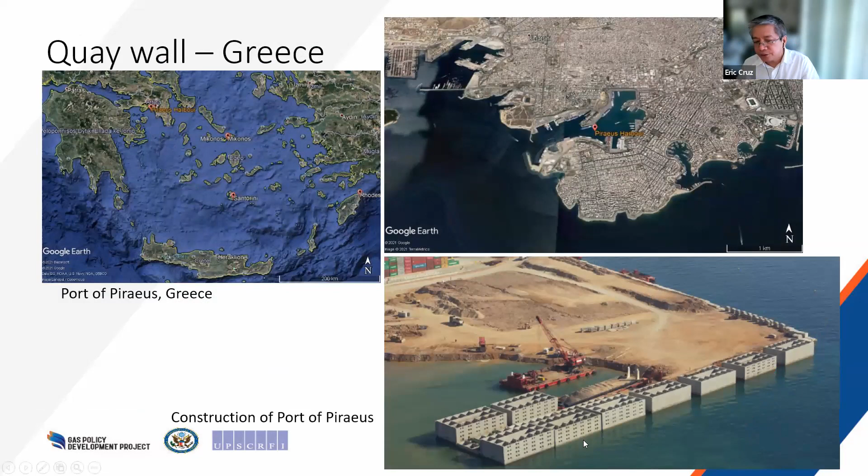And in Greece, they have this design of perforated caissons with hollow blocks, like that. So these are quay walls that are quite unique to Greece.

Our own Port of Manila, it's something like this. But it is not - it's not the Port of Manila. Our quay walls are of this type.

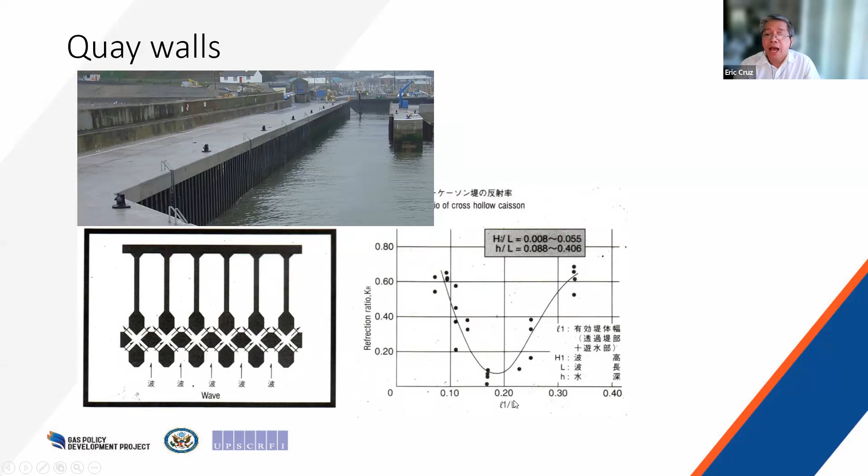Okay, I think this is the last slide for this topic. Meron pa bang time? I think it's only up to 4 o'clock. So I see that already. Tama ba, Angelo? Yes, sir. Go ahead. Sige, so this is my last slide.

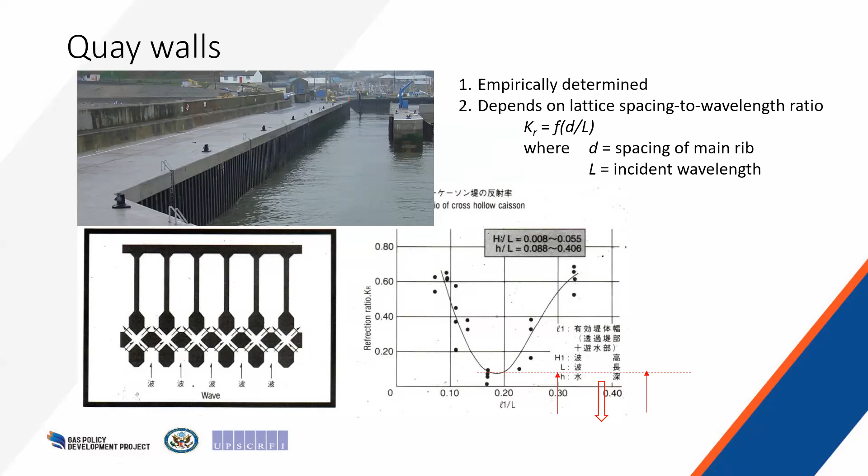Thank you for your attention. Sorry, I couldn't finish everything. The next part would have been the mooring structure, and design of the fixed structures inside the port, like the pier, and subsea pipelines to carry, for example, the fluid or the gas from the ship to the onshore facility. I couldn't reach that.